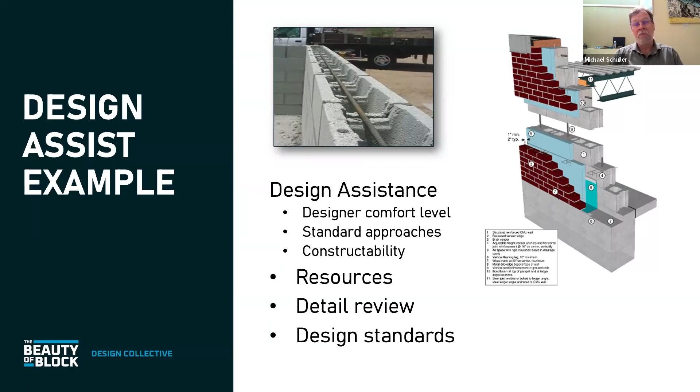Working on a rough cost, we ran a real quick design with them, and with good news. You don't need to go to 12-inch block. You could build these walls with 8-inch blocks, very reasonable 24-inch rebar spacing to have an economical design. And so that helps the producer get a realistic cost to the client when they're making those decisions early on in the design phase. So let's go to the next slide.

Yeah, this is an example from a few weeks ago. The contractor was bidding a project, noticed some odd control joint requirements, very tight spacing, and we were able to help provide guidance on this project.

Took some time, about an hour and a half, to lay out control joints and send design information to the architect so they understood what was done and why, so that next time they take the first step on their own. So overall, this whole design assistance is in a way being a friend of masonry, somewhat of a mentor to answer tech calls that range from simple things like, where do I find this in the code, to actually sitting down and working on details and design calcs with them.

So we improve the designer's workflow, speed up design, getting them thinking about constructability. They'll use masonry more and use block more. So we've had really good success over the years with this approach. And yeah, I'm looking forward to helping the Block Design Collective develop that expertise and offering that to designers, owners, and others in the industry.

Hey, Mike, I have a question, Michael. Yeah, sure. We built buildings 25, 30 years ago out of 8-inch block in the seismic zone. Why all of a sudden are engineers using 12 and 16-inch block on the same building? Well, things change over the years. I know, sometimes the wind loads are all over the place. They change about every 5 years. And sometimes that has not a beneficial effect on our design. So some of it's related to loads, same with seismic, but a lot of it's familiarity.

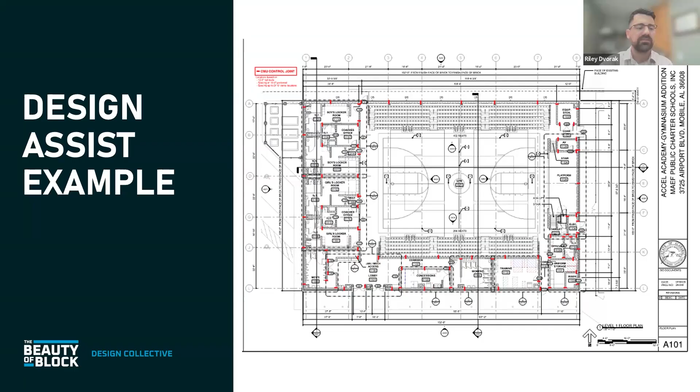I'm going to keep us moving if that's okay. Yeah, thank you. Next, we have... Thank you, Mike. Really appreciate that update. Mike has been fantastic, and we really are blessed to have him as part of our team.

Yes. So we realize that our impact as a team can only go so far. So to really exponentially increase our reach, we're best suited having focused efforts on equipping local block promoters, architectural sales reps, and association level folks. So equipping the industry is another key initiative for us. We've got a launch that we have actually specifically targeted towards the industry to spread awareness and get every one of our partners, everyone in this industry on board. And then through that, we can have a much greater impact by kind of arming our forces.

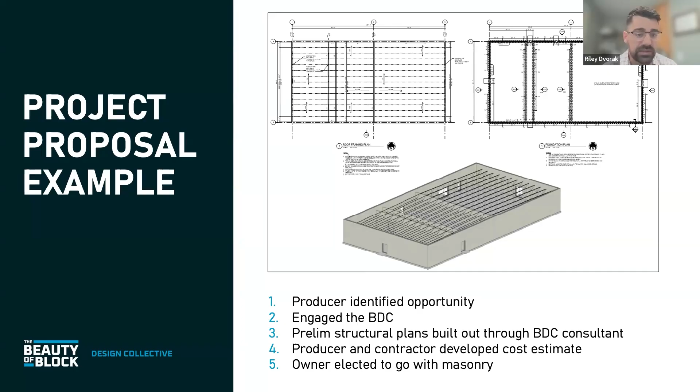Is this structure here where a producer approached us with an opportunity, who had a foot in the door with an owner. He engaged us, and through what we're doing at the Design Collective and the consultants that we have, we developed a preliminary set of structural plans. And then we turned that over to the producer who had a contractor partner, and they developed a cost estimate, pulled that together for a proposal to the owner. And at the end of it, the owner elected to use masonry for his structure. So this is a pretty small structure, just a single kind of warehouse style. But obviously it was a success and something that we can build off of.

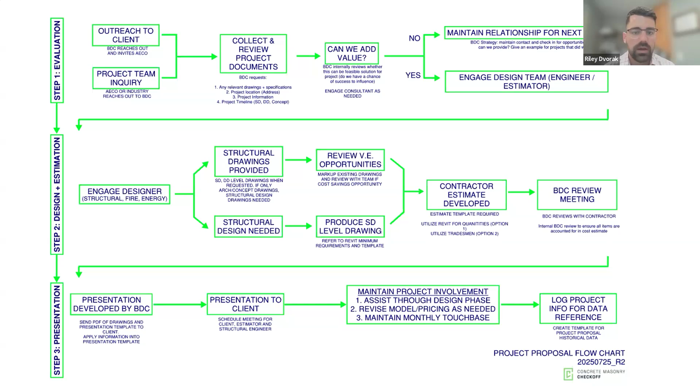Since then, we've developed a little more of a defined process, and this is just what we put together as a flow chart to describe our system for delivering these and how we can do that based on where the project's at and what we have to work with. And this is just going to help us deliver things a little more efficiently and with a higher level of quality. Next one is delegated design.

So this is kind of on the forward thinking front, just a very exciting initiative that we're trying to get off the ground and drive through the Design Collective. And this is the delegated design of masonry structures. And we believe that shifting the design community to deliver with this method is going to have a tremendous impact for our industry. It's going to boost design efficiency and also seek to expand the scope of masonry. So with the BDC, we're trying to get the right people involved. We're trying to standardize the process and have the right supporting resources that we need to communicate that out to the industry and the AECs at large. Jamie Davis with the firm Ryan Biggs Clark Davis, one of our partners.

She's on the call, I think. Yes. Jamie, are you on? Yeah, okay. I'm here. If you want to walk us through. Obviously, Jamie, if you don't know her, she's one of the pioneers of this initiative even before my time. I'll turn it over to her, and she's going to just talk you through what this process is and how it really benefits the industry.

Sure. So you've heard a little bit scattered throughout today about the challenges that masonry has, and a lot of them stem right back to the lack of education coming out of schools, the fact that people are just using archaic details that were used by people that they worked with 20, 30 years ago. Nothing's been updated. Masonry is not used as much on a day-to-day basis, so the designers are rusty on it. And all of this leads to very inefficient designs, which we've heard of, and which Mike spoke to too. And then this perception that masonry is too expensive.

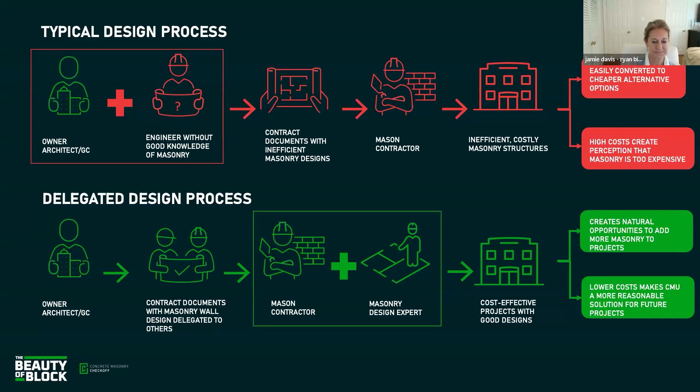Very good. Thank you, Jamie. So now's kind of the last portion, I'd say the highlight of what we want to go through today. I'm going to bring in our three regional directors. So Chuck's going to kick us off, and then Lauren and Tino are going to come in on the back end just to talk a little bit about what they've accomplished specifically in their regions up to date. So Chuck, I'll turn it over to you. Great. Thanks, Riley. And I know we're a little pressed for time, so I'm going to burn through these as quickly as I can.

So in Region 1, similar to the 4 pillars that Riley showed you, we've essentially settled into these focus areas. And I'm just going to give you guys some quick examples of successes that we've had in them. And I'm going to go a little bit out of order to stay in the vein of what Jamie was just explaining to you. So we, for delegated design, have had 4 meetings so far. We started out with just 5 people, and the last one we had a dozen people on the call.

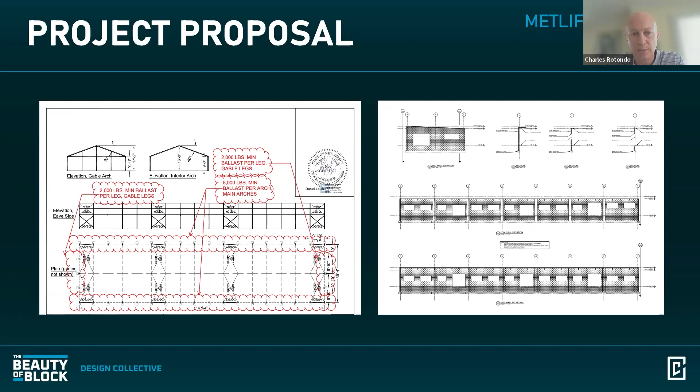So that really lends itself to what Jamie just explained. We'll get those drawings and see if there are any inefficiencies or areas where we can add some block. And this one, just an FYI, is a little over 7,000 blocks. So again, not a big building, but we do view it as a success in Region 1.

Next, project support. So this is the design assistance we're offering. This was pretty ideal for the way we want these to go. This came in through Glenwood Mason Supply. The architect is SLCE in Manhattan. They had a question about encasing some steel beams with masonry in order to achieve a 2-hour fire rating. I leaned into David Biggs to help me with this. And I know Mike said, ideally we want to get these turned around in a day. I think the important thing to note is that we responded within 24 hours, and then it was a few days of back and forth emails, but we did get this one turned around in a few days.

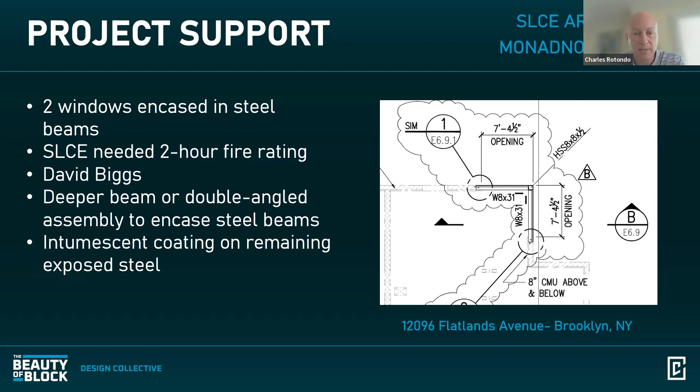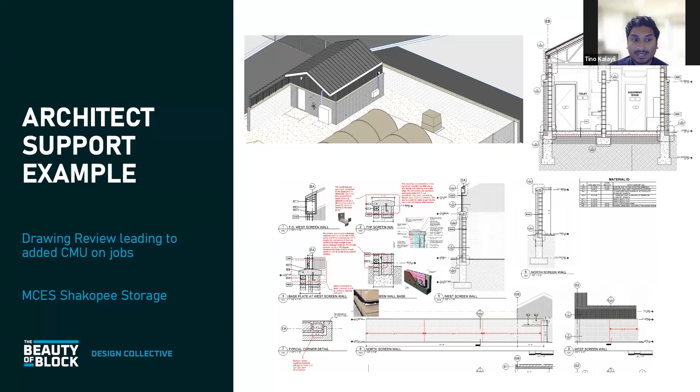So we went through, you can see we marked up all their details to give them tips, tricks. We gave them redesign efforts, control joint locations, rebar strategies. And although this was just 5,000 block on this project, the architect said they work on hundreds of storage sheds a year, and that knowing that CMU is a good solution, they're going to be coming back to us to talk about all their projects for the next year. So this was a big win. And the title of the project is in the bottom left. So drawing reviews can lead to adding CMU on jobs is the big takeaway here. Can we go to the next slide?

Here's an example of a project we helped an engineer with. So this was after a webinar where we presented on delegated design to structural engineers of Nebraska. An engineer reached out and said, "Hey, is this something you can help with?" Where they had 3 cores that were cast in place concrete, and they also had steel brace frames on this project. And they said, "Can we do CMU? Can we do CMU as a lateral system? And if so, can we remove the steel brace frames to make it cost effective?"

So this is one where we engaged a consultant, and it was Sam in this case, and we gave him a structural design that worked. And we went through multiple iterations to make sure it was the best solution with them. And this removed the form requirement for those cast in place concrete cores because you're doing it in CMU, and it removed all the steel braces on this multifamily project, showing value. This was one where the engineer did not feel comfortable designing with CMU, did not know what strengths and block were available in the area as well. So we reached out to the producers in the area, made sure they were comfortable in speccing the CMU on the job as well. So this is a great win for multifamily and how we showed value to engineers.

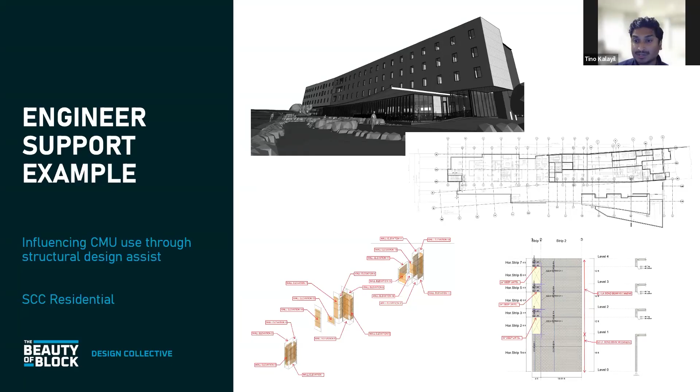So next one is GCs and owners. I've actually made a really big effort in communicating with pre-construction teams because they see it and they evaluate systems really early on. And with precast and prefabricated metal, it's really easy because you just show them a massing and they'll spit up a design and a cost straight to the GC. So I'm trying to do that with concrete masonry in our region.

So this is one where it was a school addition. And so we worked through the structural, energy, fire, sound, and it's also a storm shelter design here, where we came up with a CMU solution and even a basis of design for the other materials so that we look like we're one package. And we gave even quantities to the mason contractor so that they can spit up a design, an estimate pretty quick. And so this is pre-construction support. And so this is a fantastic opportunity.

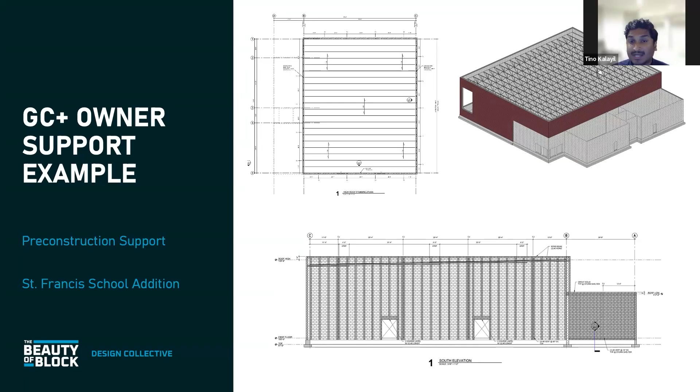Mark, you just asked, with these efforts to support design, have you been adding lump sum pricing too? This is a full package. That's the big goal. If you can get a full number in precast, you can get a full number in prefab steel. We should be able to deliver a full number that includes a concrete masonry scope. So this one is in the GC's hands right now. And so we're waiting to hear back, but the pricing looks good. And this was leading precast and they wanted to compare it with a CMU option. You can go to the next slide.

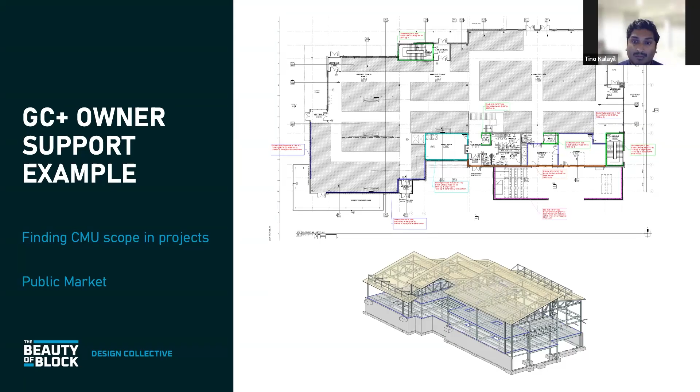So a big thing in our role is we're always talking to each other. We're always talking to each other's technical directors. And the big thing is how can we take the programs that we're approving and apply it to everybody? So there's a $1,250 program that Phil Ledent submitted for typical details that he wanted to do for the MIM in Michigan. I took that, expanded it to our region, took a little bit more details. But we've got a set of details with designer notes, sample calcs, all ready for our region to utilize.

And we in our region consider this as indirect design assistance. We use dollars from our design assistance bucket to be able to apply this because this is helping structural engineers and architects know how to design and detail things. These are good starter details. Engineers and architects are intended to just plug this into their drawing set, especially in schematic when they don't have time to develop details. They can plug this in and it'll help mason contractors develop a more accurate estimate.

If a mason contractor sees a detail that they don't really know how to construct, what are they going to do? Add dollars to the project. And those are unrealized premiums that an engineer didn't even think about. So we're cutting all that out, cutting out the guesswork. Here are typical details that have been vetted by the specialty engineers, the mason contractors, and the industry as a whole. So right now, this is in QA/QC and is one of the things that Riley mentioned as resources for our launch.

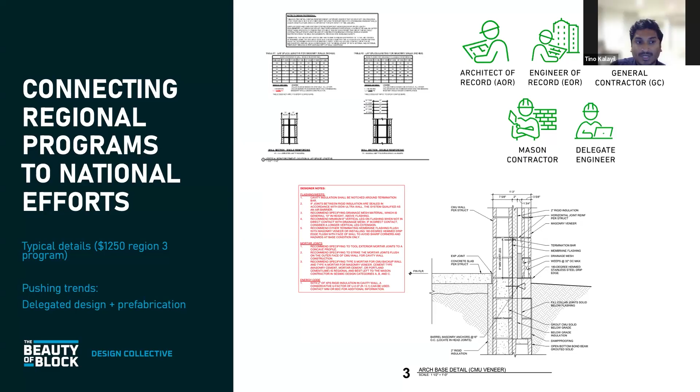And here's an example of how we can make an impact into the local market anytime. In February, Watkins Reimer, a producer in Omaha, came to me and said, we've been trying for years to get into SEA Nebraska. The structural engineers would not take a concrete masonry course. So we went there, we targeted them. So we went and had AEC meetings, we had AIA presentations, and we had meetings with the SEA group.

And what that one trip, 3 days, resulted in is we got 3 webinars with the SEA of Nebraska, and we got a commitment. They asked us to present in their spring conference in 2026, and we're working through a really influential program for 2026 to influence structural engineers. And even till today, I get emails from a lot of those SEA members in Nebraska on improvements to their typical details because they didn't realize what impact they were having in our industry.

The University of Nebraska asked us to come in and present on blast design for CMU because they didn't know that was possible. So we were able to connect them with an expert on that topic. They asked us to be part of their SEA newsletter, and that's for free. We didn't have to pay for that either. And what that one trip in June resulted in was 4 project designs, about 125,000 blocks proposed. And that's not even veneer, that's just structural block. And I did this whole thing again just this week in Omaha with even more momentum. And what this left is Nebraska with momentum, with resources.